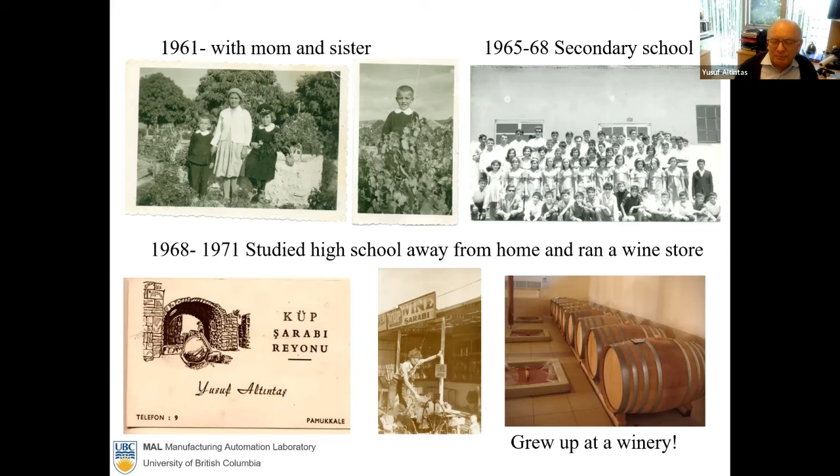I am still with the same girlfriend since high school, married with 2 children. I studied my master's at the University of New Brunswick between '78 and '79, and studied my PhD at McMaster University in Canada. I also worked 4 years in industry in between.

I joined the University of British Columbia in 1986 with $8,000 startup funding and a 1964 vintage junk milling machine, which was not operational and abandoned in the corner of somewhere in the building. I took it apart with a summer undergraduate student and retrofitted it with a motion control card and PC.

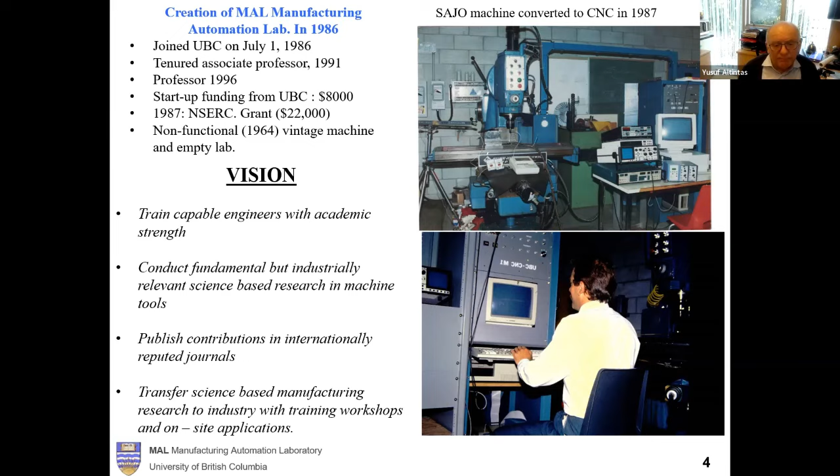Machine tool is one of the most complex mechatronic systems in industry: kinematics, structural dynamics, control theory, sensors and instrumentation, tribology, CAD/CAM, everything, pretty much. And of course, mechanics and dynamics of cutting subjects are also at the core.

Our research in the laboratory covers entire machine tool engineering, starting from vibrations, design, control, monitoring sensors, precision machine and actuator design, multi-body dynamics of the machine tool, and so on.

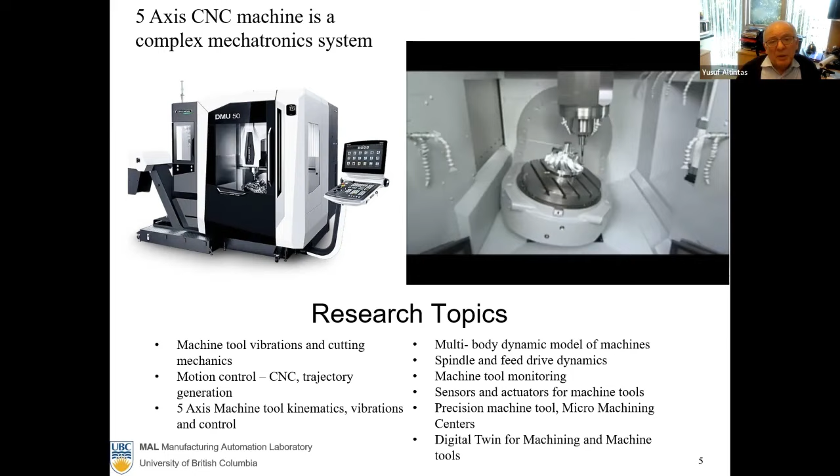The laboratory grew up quite a bit in 37 years. We currently have 5 PhD students, 7 masters, 2 postdoctors, and 5 research engineers funded by industry.

We usually receive several interns, visiting professors and engineers from different parts of the world. Up to recently, we were receiving about $1.2 million per year for research grants and contracts. The lab is fully equipped to conduct research in machine tool engineering.

We publish over 210 journal papers and a book with 2 editions translated to several languages, and the citation is pretty strong for our published work, as you can see here. Also, UBC opened a spin-off company which commercializes our research, and it is used by more than 300 companies worldwide.

These are some of the machines we have in the laboratory: an old Hardinge lathe, an old Fadal CNC - we added 4th and 5th axis, and it is completely controlled by our own CNC.

And a Quaser 5-axis machine tool with Heidenhain CNC, donated from Taiwan ITRI. And this is our newest machine, a DMU 50 Machine Center.

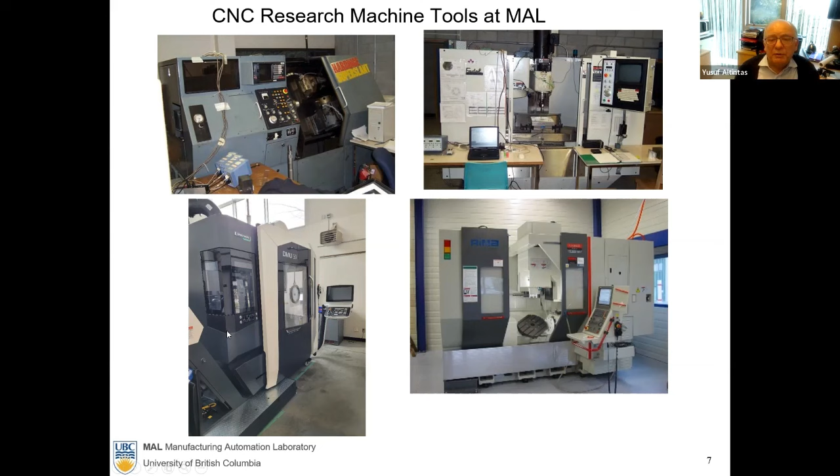And we have a CMM and Micro-machine Center. This is a 9-axis machine, which we designed and built and controlled in our own laboratory. We also built several actuators, such as fast tool servo, ultrasonic vibration assisted tool holder, and so on.

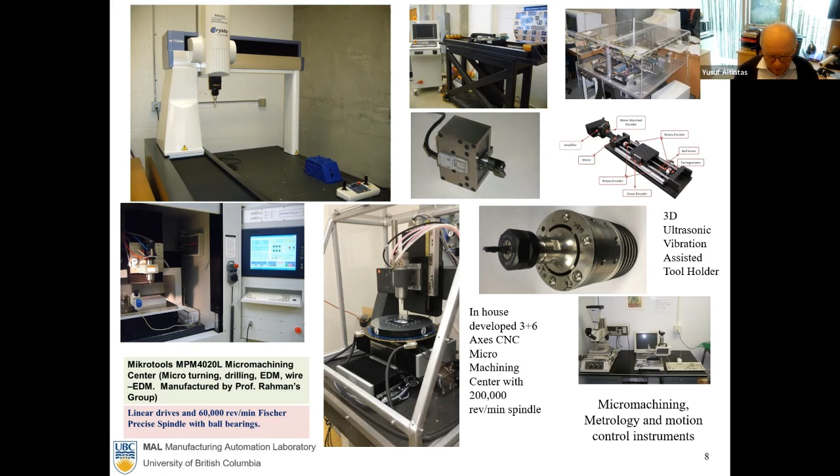Our research is published in a textbook, first published in year 2000, and the second edition was published in year 2012. They are translated to Chinese and Turkish. I also wrote my memories in Turkish.

The book talks about naive and stupid things I did when I was a child, young man, and also some stories from my town. It does not talk about how good stuff I did in university and so on—that would be nonsense. It is just more fun to read. Unfortunately, it can't be published in English, it will lose its sense of humor.

Now I can start talking about my research. Digital machining has always been my prime target. In a traditional manufacturing industry, you take the CAD model, and experienced planners design the machining strategy and select tooling and cutting conditions. The NC program is generated, put on the CNC machine, and hopefully the results are satisfactory. If they are not, you go back and repeat the trial and error cycle.

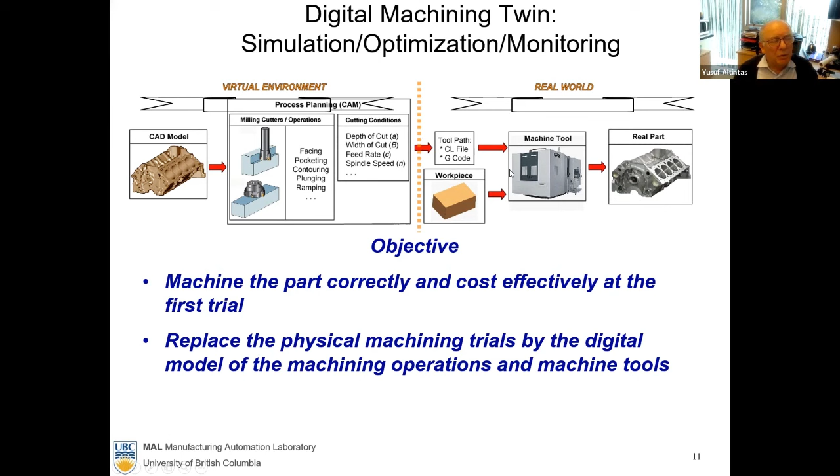The first paper I wrote in this area was published in 1991 when I became a CIRP member. This was a paper from Dr. Spence's PhD thesis. We developed a 2.5-axis CAM system, and we integrated physics of machining into the system, and used that for monitoring and control of the process as well.

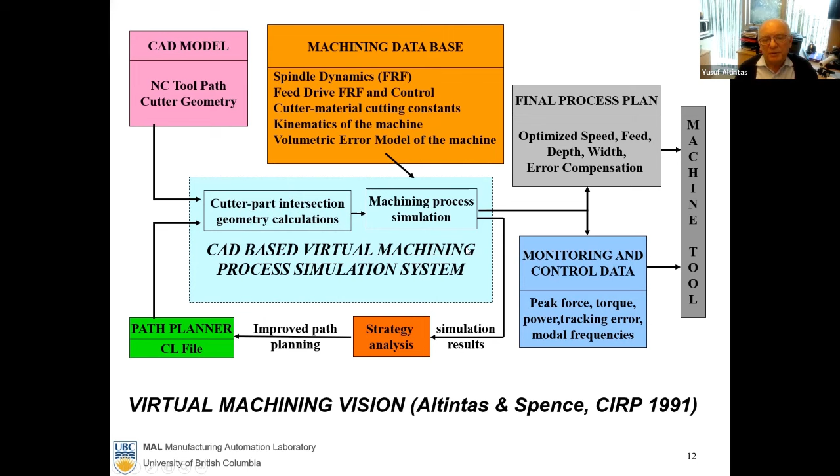Since then, of course, we progressed quite a bit, and we realized that this was a huge research task. Digital machining has three fundamental modules. The first one is the CAD/CAM module. The second is modeling the mechanics and dynamics of the machining operation.

We packaged our theories into one software called CUTPRO, which was released in year 2000, about 23 years ago. The third part is machine tool kinematics and CNC. Since we developed our own CNC, first out of poverty, later out of fun, we can also mimic the CNC.

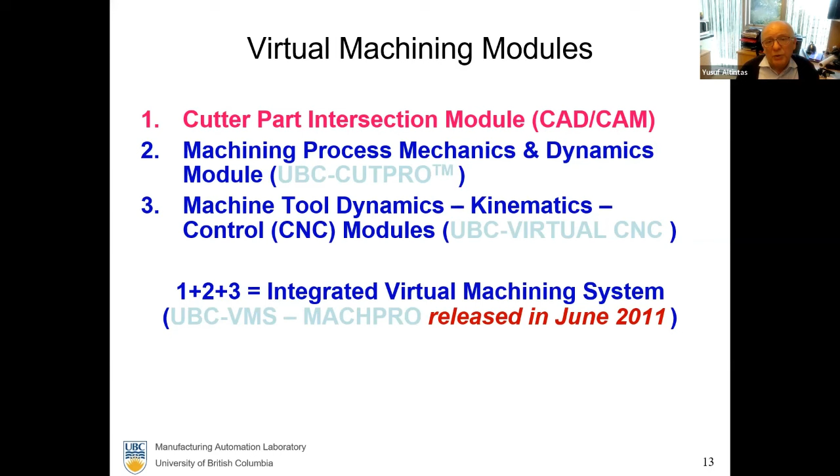By integrating these three, we developed a virtual machining system, and it was released to industry as a commercial product under the name of MACHPRO, back in June 2011. I will walk you through now these three steps. The first one is CAM.

Here I show you a very simple prismatic part machined with a helical end mill. As the helical end mill moves along the tool path, it will engage with cavities and holes, so the geometry is not constant. It varies depending on the part features. When the tool goes over these cavities, the chip shape continuously changes, as you see here.

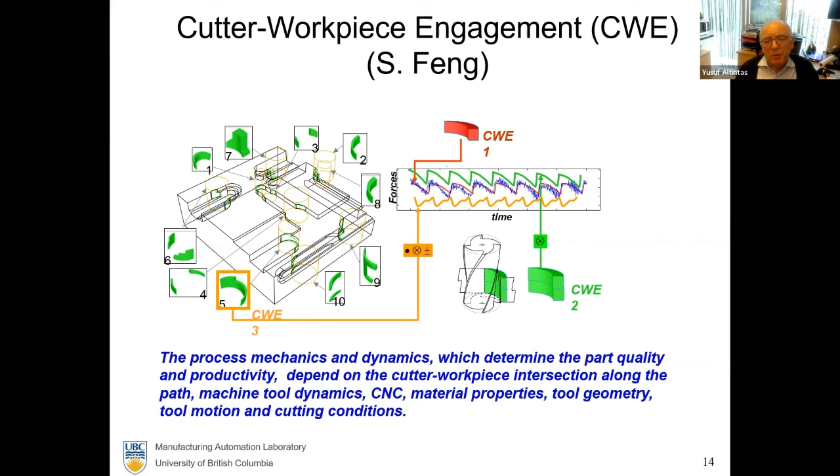The chip shape is used as the boundary condition to predict cutting force, torque, vibrations, and so on. Therefore, the cutter-workpiece engagement along the tool path must be calculated. We conducted research in this area, but later Professor Steve Feng joined our department—this is his expertise. The second is mechanics of machining.

We approach this problem in two directions. One is so-called micro mechanics, where we consider temperature, strain, and strain-rate dependent material properties in this plastic deformation zone, which is called the cutting zone or primary deformation zone. We use both finite element techniques as well as slip line techniques to predict stress, strain, and temperature distribution within this small cutting zone, which may be typically 200 microns by 200 microns.

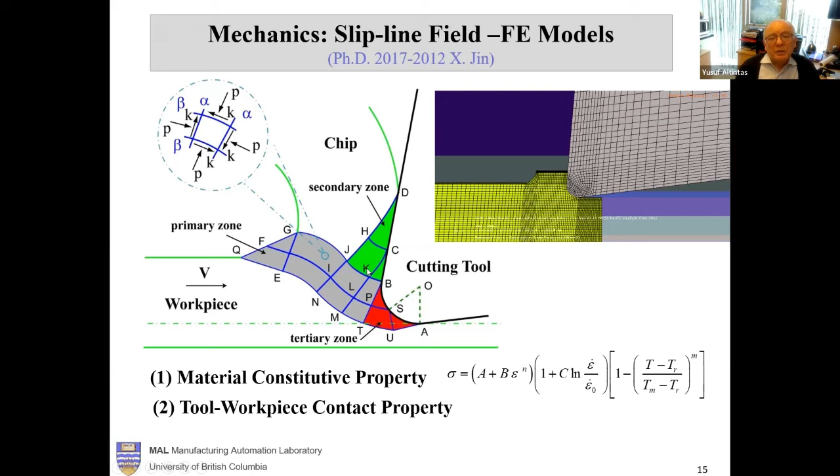We also use a macro mechanics approach to predict the forces in the cutting zone. Here we have a typical oblique cutting mechanics model. By using material properties, tool geometry, and cutting conditions, we can predict the forces acting on the rake face, normal and friction force, basically.

If we can predict these forces as a function of material property, then we can transform these forces to different kinematic configurations, such as turning, boring, milling, drilling, and the list can go on. But common to all of them is the cutting process between the chip and the tool here. The rest is nothing but mathematical transformations.

Therefore, we developed cutting mechanics models to predict the force between the rake face and the chip, and we adapted that mathematically to any machining operation. This was our philosophy, studied by Dr. Kilic, who is now professor at the University of Manchester.

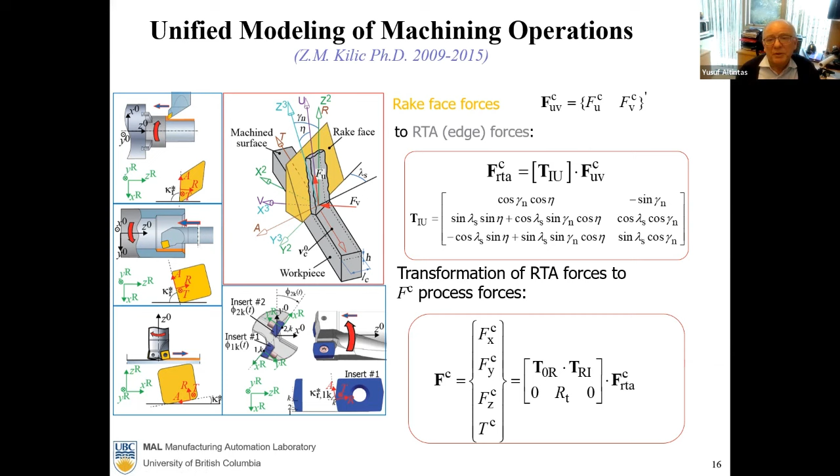Here is one sample result. The tool is a taper helical ball end mill with variable pitch, machining titanium, which is a very difficult material to cut. You can see the comparison between experimental measured cutting forces and simulated results, which are not bad.

We use shear stress, shear angle, and friction coefficient of the material to predict these forces, back in 1995, a while ago.

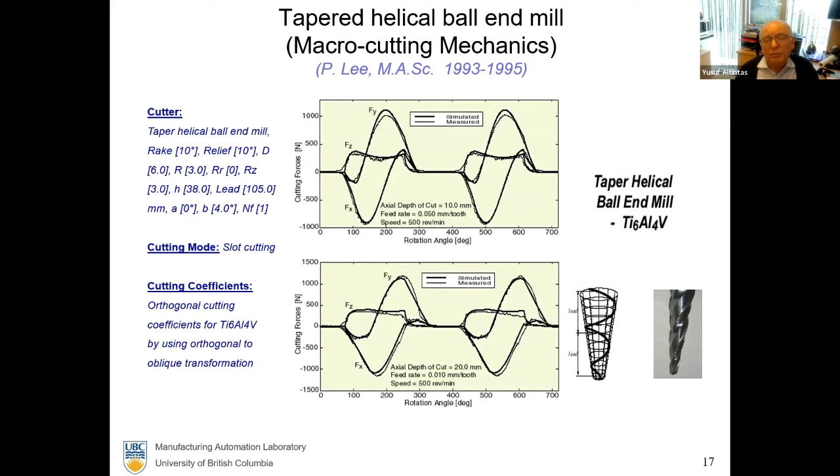When it comes to micro-machining, tool diameter could be as small as 100 or 200 micron. Chip thickness would be 2-3 micron only. The amplitude of the forces would be within 1 Newton as opposed to 1,000 Newton.

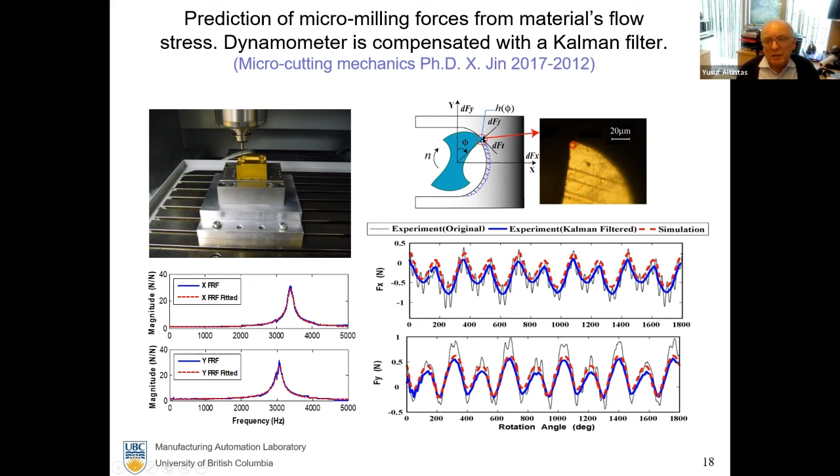Even the measurement of forces is difficult here, because if the rotational speed is too high, tooth passing frequency may be too high and resonate the dynamometer, and the force measurements will be incorrect. We developed some compensation techniques to predict the correct force from measurements.

One of the biggest problems in industry is machine tool vibrations. Here we have a diagram of a typical machine tool, which has heavy components such as the bed and the column, medium-sized components such as the headstock, and lighter components which move, such as spindle, tool holder, and tool assembly.

Lower the spindle speed, you tend to use large cutters and vibrate large parts of the machine tool. If the tool diameter becomes smaller, you rotate the spindle at higher speed to reach a certain cutting velocity. Then you tend to vibrate the parts with higher natural frequencies, such as lighter parts like spindle, tool holder, and the tool.

Machine tools are flexible because they are made from steel. When the tool rotates and impacts the workpiece, these flexibilities are excited, and we create transient vibrations, which leave a wavy surface behind. When the second tooth comes and impacts, then if the vibrations do not diminish...

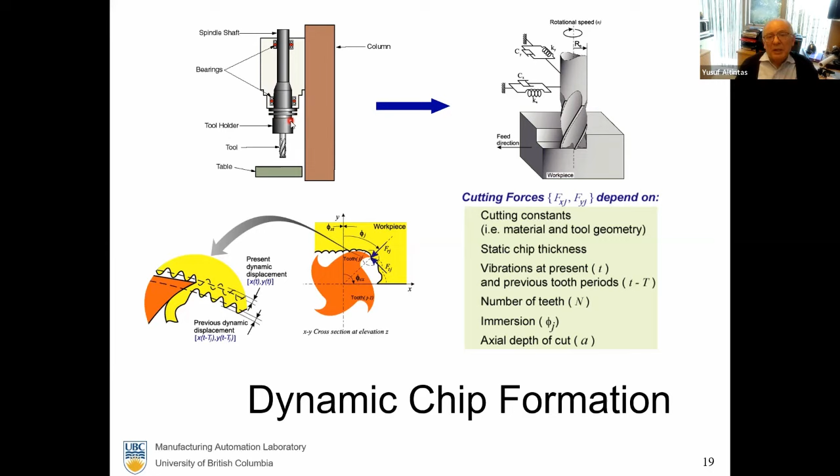As a result, we have 3 types of chip. The first one, there's no vibration, which is impossible. All machine tools vibrate. If the cut is very light, you hardly have any vibration naturally, but that's conservative, non-productive machining.

If the vibrations become unstable, we call that chatter vibration, where outer and inner waves on the chip surfaces have a phase shift. They shift relative to each other. These vibration amplitudes exponentially grow until the tool jumps out of cut or you break something.

The chip may be almost zero when the 2 waves touch. Then it can become large, almost 3-4 times larger than the feed rate. When the chip grows, the force grows, therefore the load on the tool and the structure grows, which may cause tool breakage or damage to the machine and the part.

The objective of scientists is how can we make these 2 waves as parallel as possible, which is physically impossible, but you can get close to this situation. Imagine a case when these 2 waves are parallel. Then the machine is allowed to vibrate, but the chip thickness remains constant, like here.

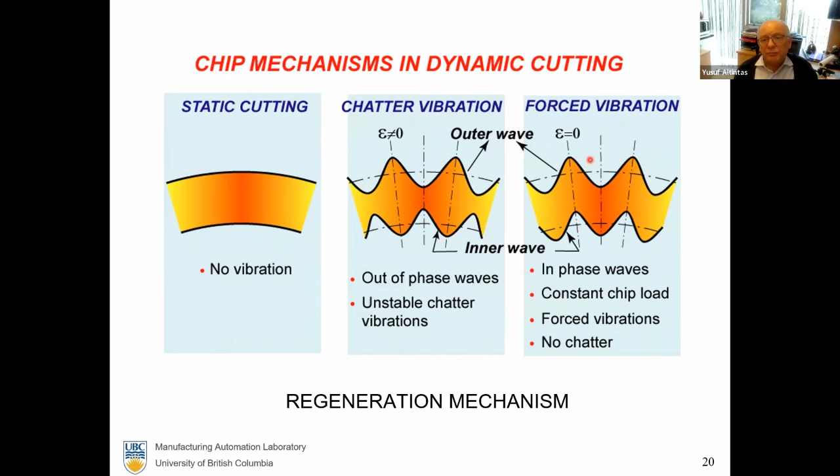If we take a look at a typical mathematical model of the chip, the first one is the static chip thickness. In milling, it sinusoidally varies as a function of the tool's rotation angle, phi. This is due to rigid body motion of the machine.

Then we generate vibrations at present time t. The vibrations in x and y directions are superimposed in the direction of the tooth, phi. And also, we consider vibration marks left during the previous tooth period. So the time delay Tj here is the delay time between the present and the previous tooth. Again, we project the vibrations.

When you sum these three components, you get the true chip thickness, which is a long equation. Since the tool is rotating, phi is changing. Therefore, the chip thickness is changing.

Since vibrations x and y are also time varying, they also change as a function of time. As a result, we have time varying chip thickness, but it is periodic at the tooth passing frequency, which is the inverse of capital T here. When the tool is in the air, then we have no chip, so we have a discontinuity, which is governed by the G function here. This is just to give a window of theory in stability.

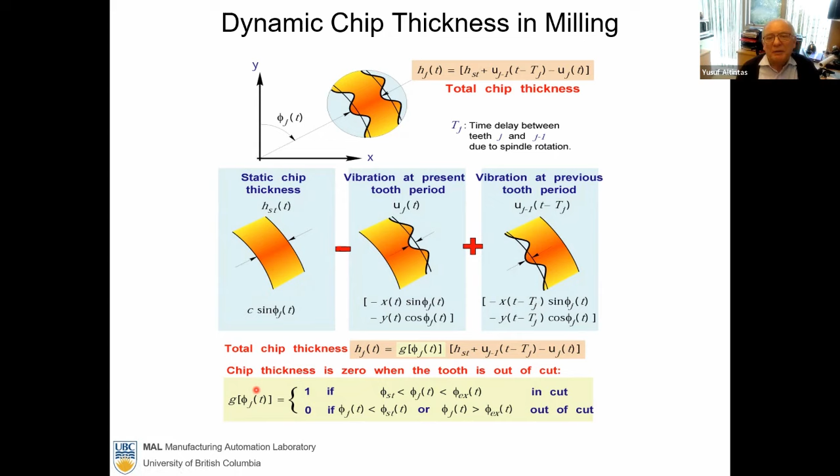If we take the most simple case, 2 degrees of freedom, that means single degree of freedom in X, another single degree in Y, and we have periodic time varying coefficients, matrix A here, and we have vibrations with delay terms here. Since this is a non-diagonal matrix, this is a periodic coupled delay differential equation, which is difficult to solve.

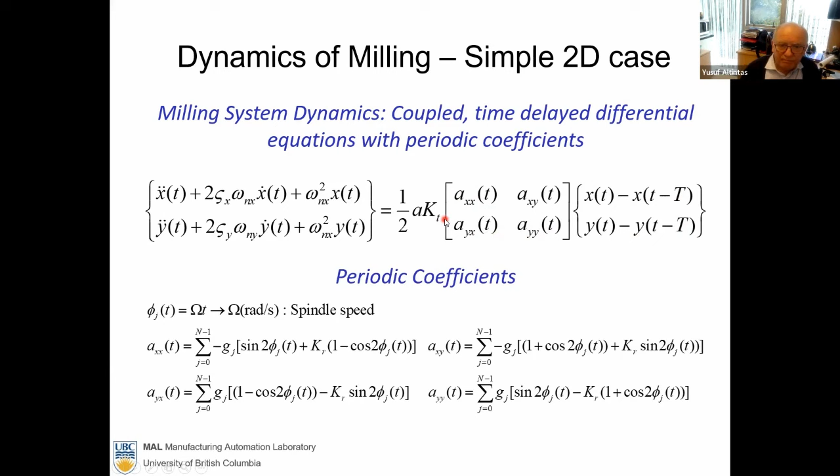Dr. Budak, now professor at Sabancı University, solved the stability problem in his PhD thesis in our laboratory back in 1994, and we proposed two solutions. One is the zero-order solution, which I presented in CIRP, and the other is the multi-frequency solution, which we published in ASME.

Zero-order solution is very straightforward. KT, KR are the material properties, FRF is the dynamics of the machine, and we reduce the stability problem into an eigenvalue problem like this—a second-order quadratic equation. A0 and A1 are material and dynamics dependent coefficients. Lambda is the eigenvalue with real and imaginary parts.

Physically, the eigenvalue equals depth of cut, material's cutting force coefficient, and the delay term, which contains spindle speed. So if we solve the eigenvalue with real and imaginary parts—two knowns—we have two unknowns: depth of cut and the speed. We can solve the stability diagram. This was our contribution to the literature, which is now widely used worldwide.

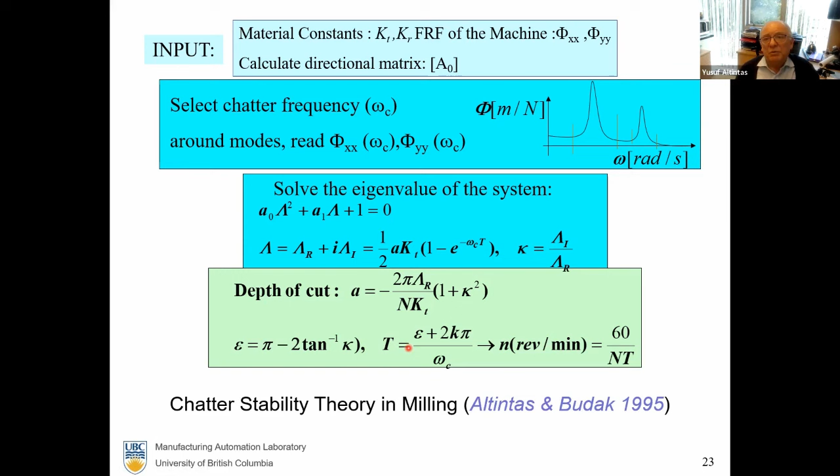For example, this is a cutter with circular inserts. The blue curve is the numerical time marching solution, which took about 24 hours. The red curve is the analytical frequency domain solution, which took less than a second. In industry, no one will wait 24 hours to look at the possible solution for chatter, but people can wait a second, and the results match almost perfectly, which proves the accuracy of the theory.

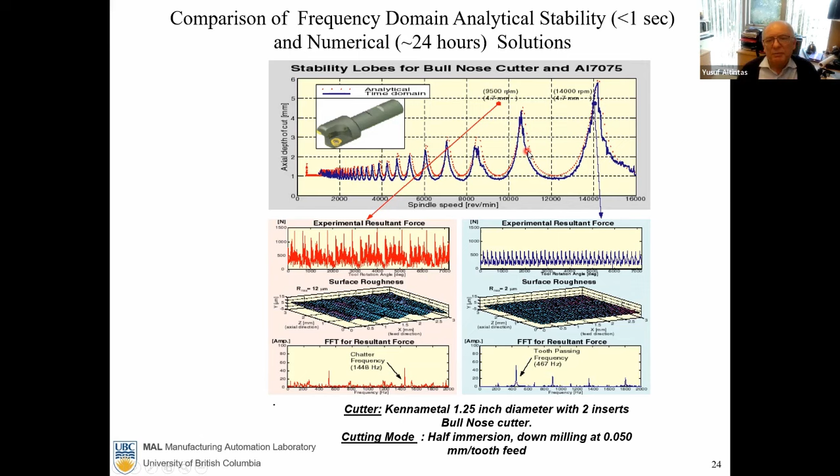We launched this theory to industry by developing a software called CUTPRO. The user gives impact blows to the cutter with an instrumented hammer and measures the vibrations. We measure the frequency response function, and we automatically fit curves to identify model parameters such as natural frequency, damping ratio, and stiffness.

We use the work material and tool geometry coupled with the dynamics of the machine, which is measured, to predict stability charts. This is the stability chart, meaning how deep you can cut at which speed. You have to operate the machine under the stability curve. For example, here the most productive cutting conditions seem to be 7,500 revolutions per minute, about 6 millimeter depth of cut, and this is used by the NC programmer to generate the part program.

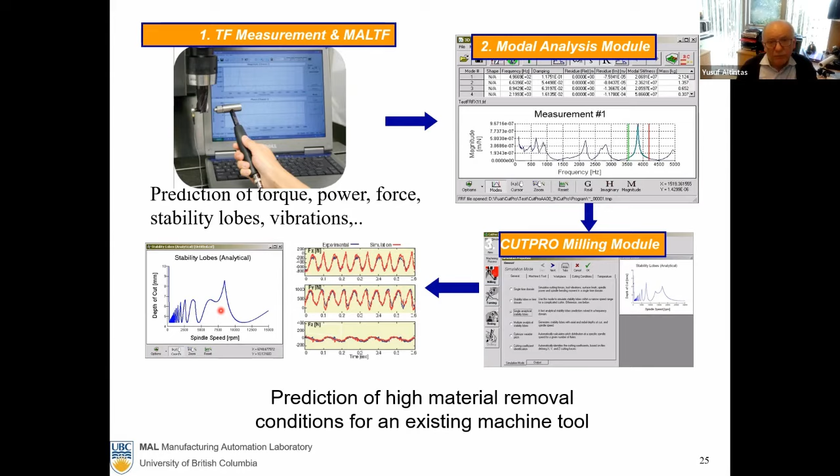And here is an example: at 15,400 the machine chatters. This way, you can improve the productivity of the machine tool drastically.

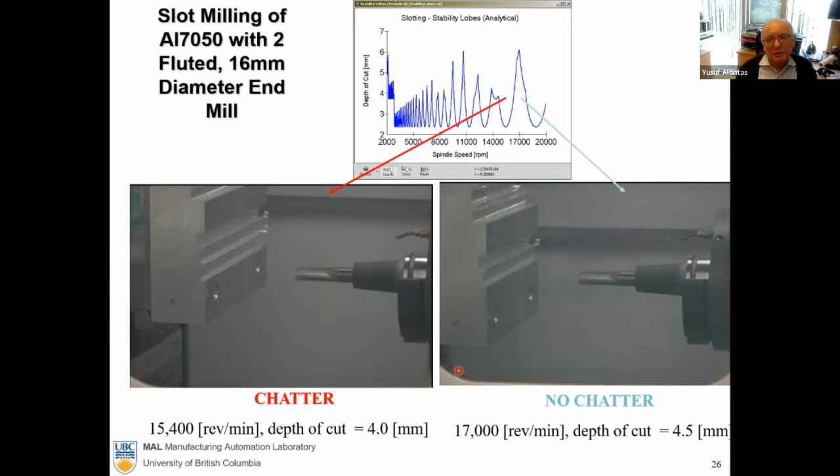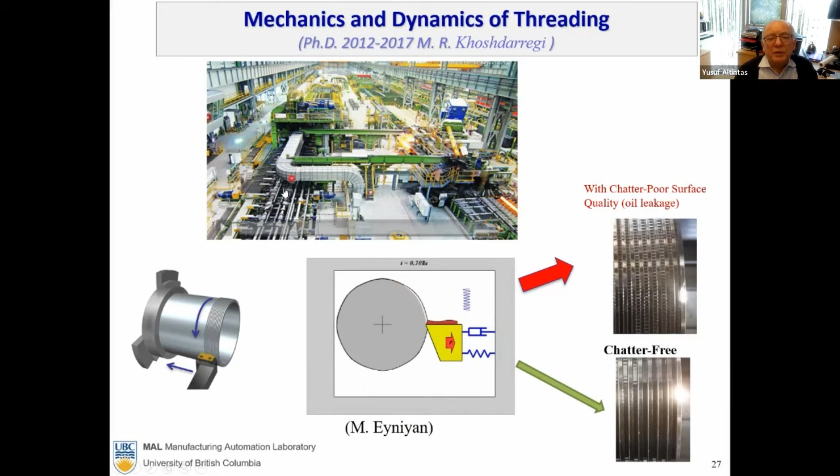We work on other issues as well. Here is the animation of chatter development. I borrowed this from a former student, Dr. Mehdi Eyniyan, and it's a very good illustration to show how instability occurs in machining. This is from one PhD thesis.

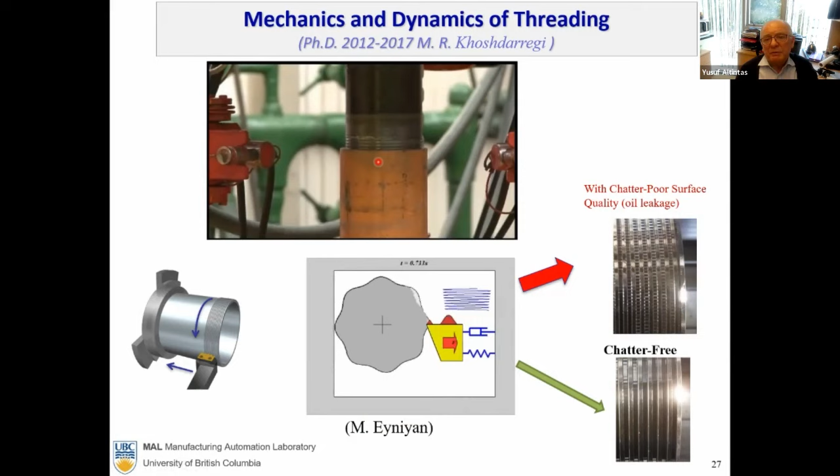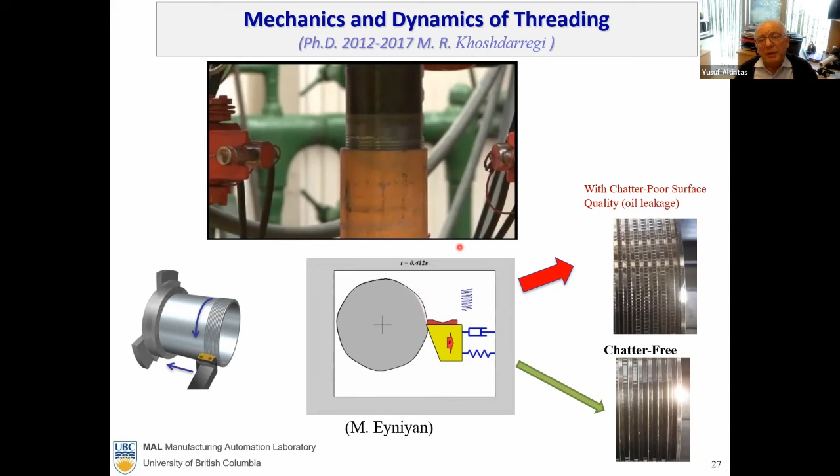A Mexican company approached us because they had pipe failure at the threaded joints. In subsea applications, this could be environmentally disastrous. During threading, this pipe is highly flexible, it has so many mode shapes, and if it chatters, the wall thickness of the threads would not be uniform. In some locations it would be so tiny, and it would shear during fatigue failure of the pipe. The project was to model this complex process, and we did. We packaged the mathematical model into software and released it to the company, and also published everything in open literature.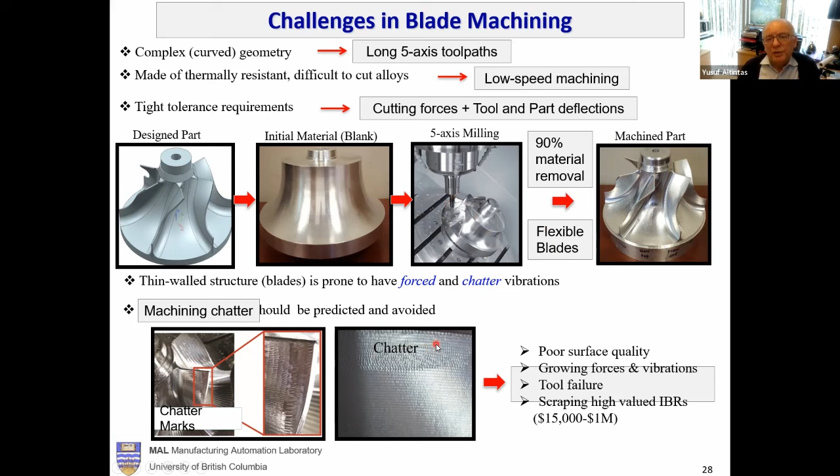This is unacceptable. The project was to digitally model the entire blade machining operation in a digital environment. Let's say this is the blade—at each point, the flexibility of the blade is different. Furthermore, as we remove metal along the tool path, we are changing the mass of the structure continuously. Therefore, blade dynamics is also changing as a function of time.

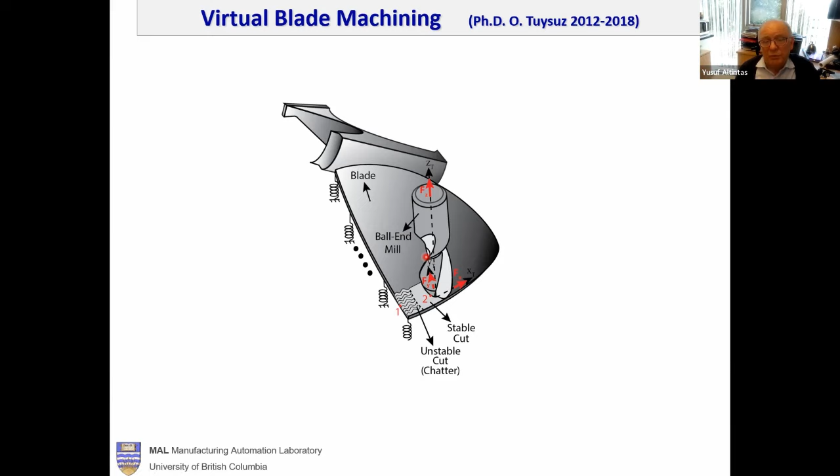If you freeze the process and run finite element analysis at each 1-2 millimeter step, it would take days to simulate the operation. Therefore, a PhD thesis studied substructuring techniques to update the FRF of the blade without going through an eigenvalue solution for the full finite element model. The steps are as follows.

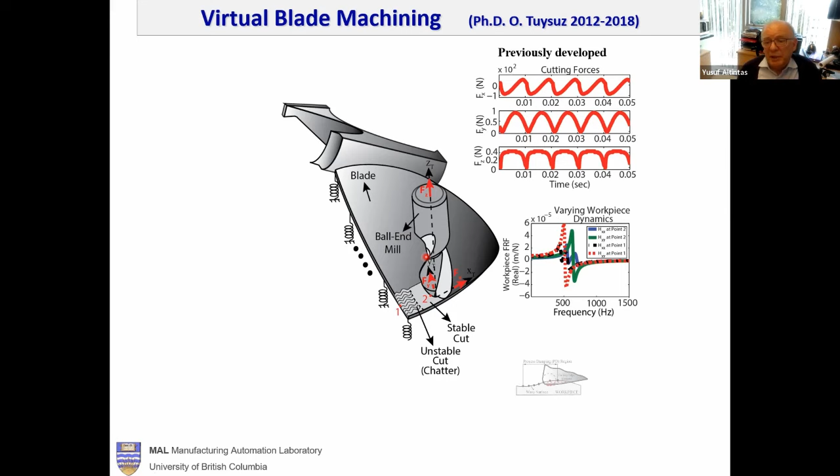We can predict the forces if we know the cutter-workpiece engagement, which is known. Then we predict the FRF along the tool path as the mass is removed. We include contact between the flank face of the tool and the wavy surface, which is called process damping, to predict stability charts.

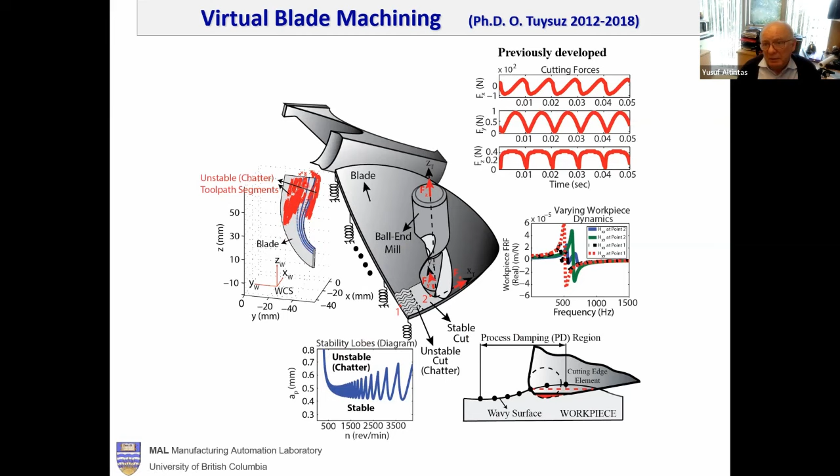Along the tool path, we can tell the engineer: look, you don't have any chatter in this region, but here the blade is too flexible and you are machining aggressively, and you will get chatter, which will be unacceptable in production. So the engineer can improve the tool path until the chatter is gone.

We can also predict the deflection errors left on the blade. For example, here we predict about 80 micron deflection, and the measurement is also close. We are still studying this, it's a highly complex problem. We can never probably perfectly predict the outcome, but as you see, we are not that far away from measurements.

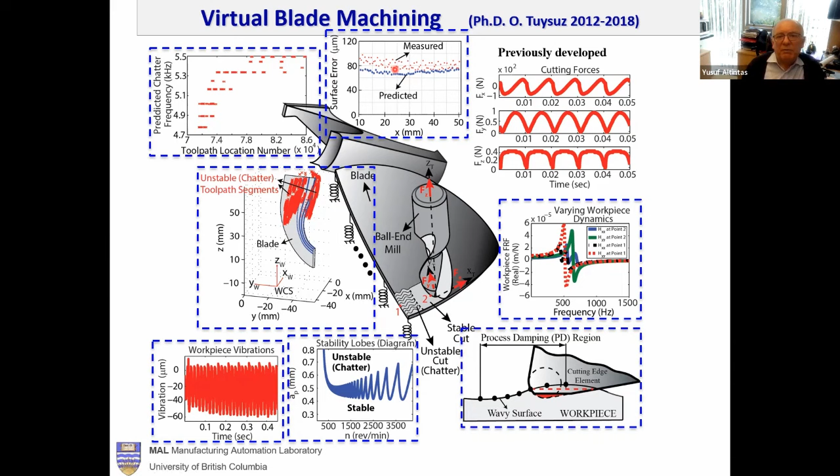Now we have another student, Behnam, who is about to finish his PhD on the same topic, and hopefully we will release this to industry within a year.

All of these physics-based models are incorporated into digital simulation software called MACHPRO, and the mathematical models were developed by Dr. Merdol in his PhD.

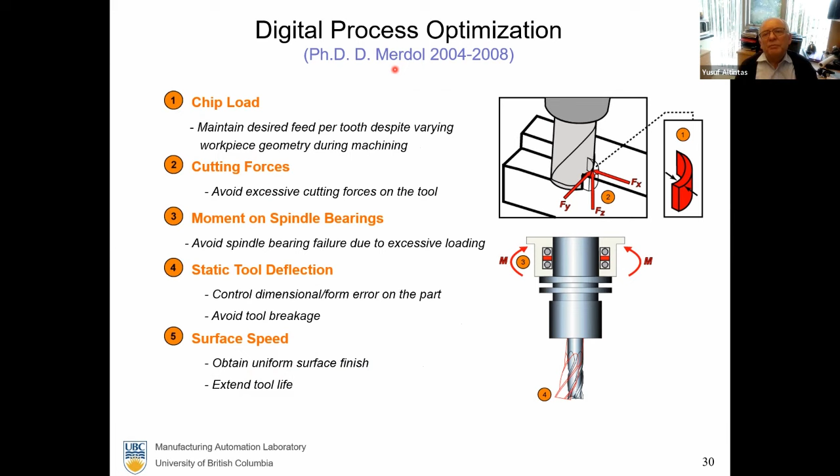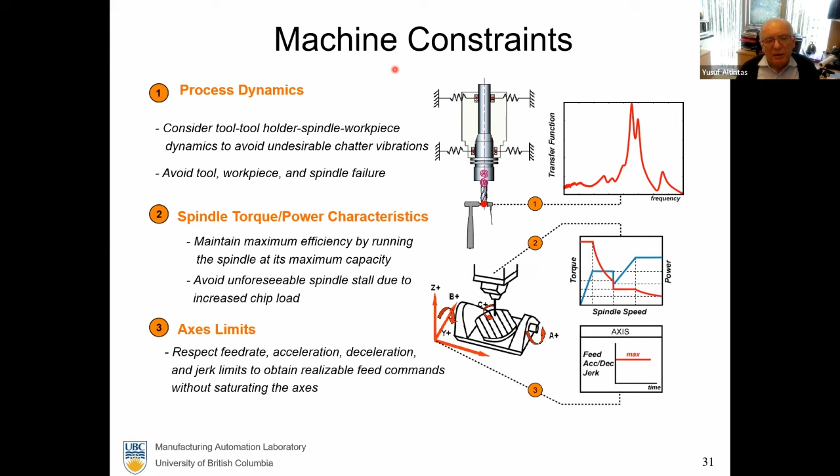We include chip thickness, force, torque on the spindle and power, drive motors, axis limits, all of them as constraints. We give the NC part program to our software called MACHPRO. Not only do we simulate the process, like you conduct a cutting test on the machine, put sensors and measure the states, you can predict ahead of time everything.

We also optimize the NC program to adjust it to fit the machine without any tool breakage, excessive deflection, overloading the spindle, and so on.

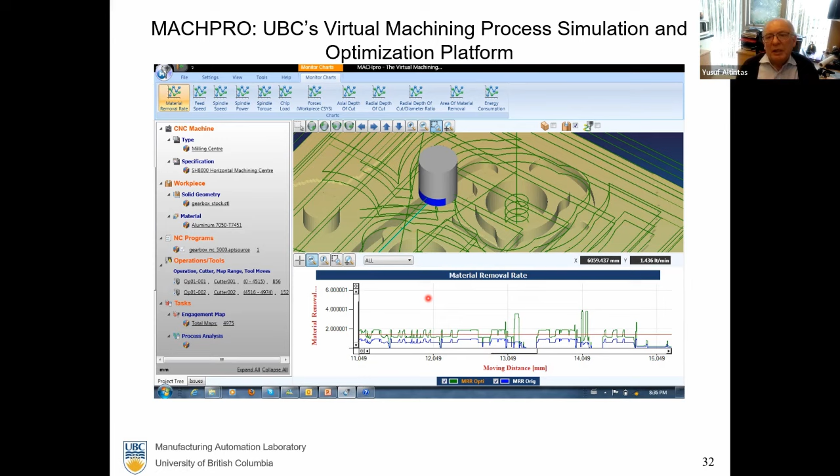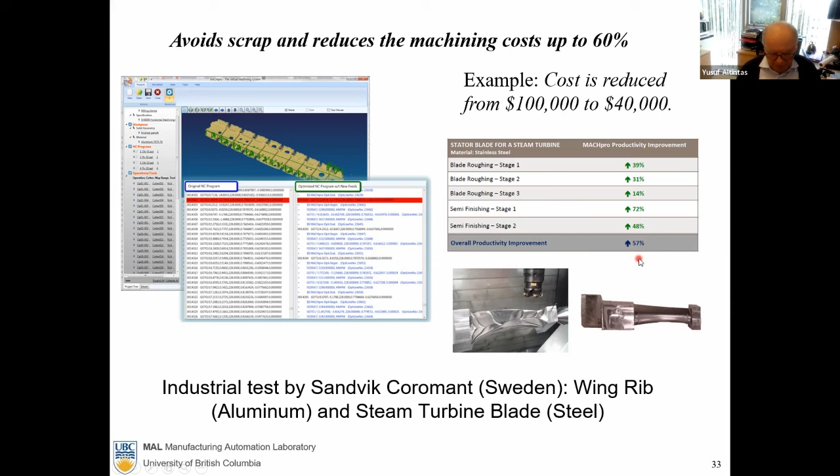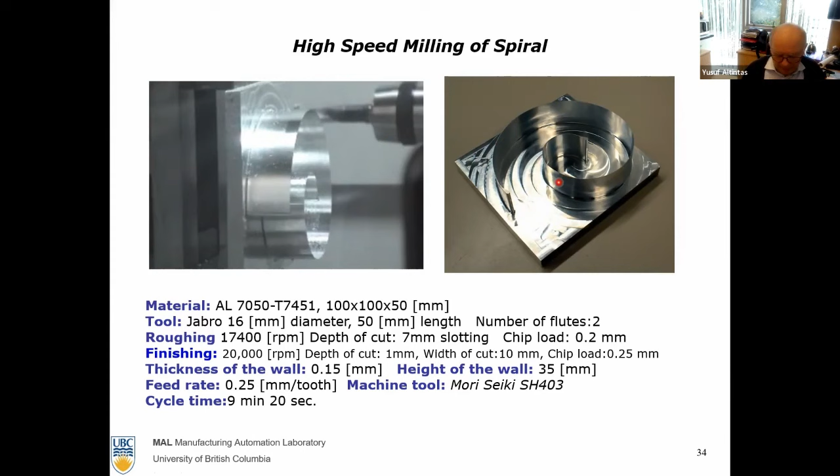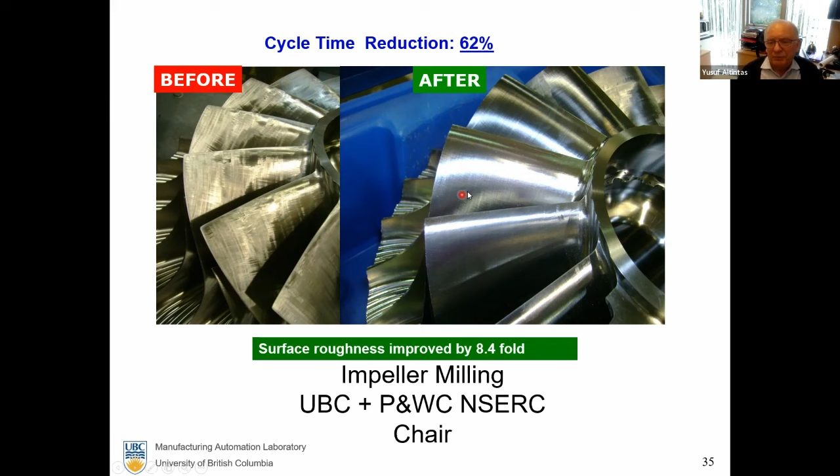This comes directly from the machine center.

We also work on flexible multi-body dynamics of the machine tool towards machine tool design. When the machine tool parts change their location during machining, their dynamics also change. We call this pose or position-dependent dynamics of machine tool structures. We develop substructuring techniques to calculate the dynamic behavior of the machine fast, in a computationally efficient way.

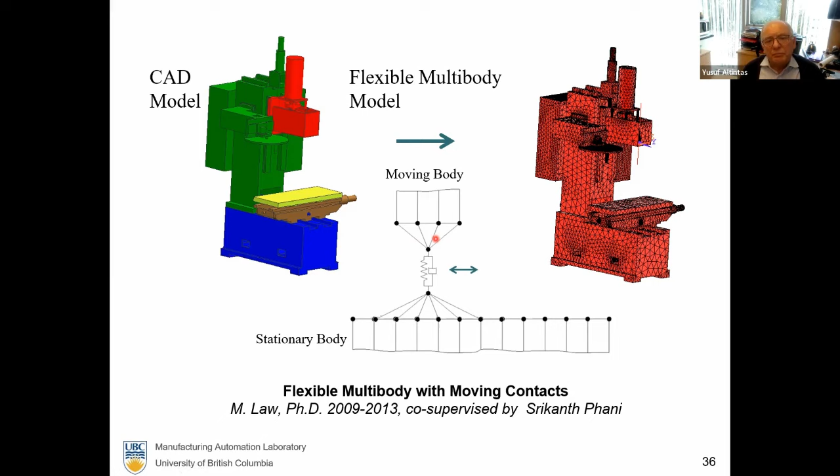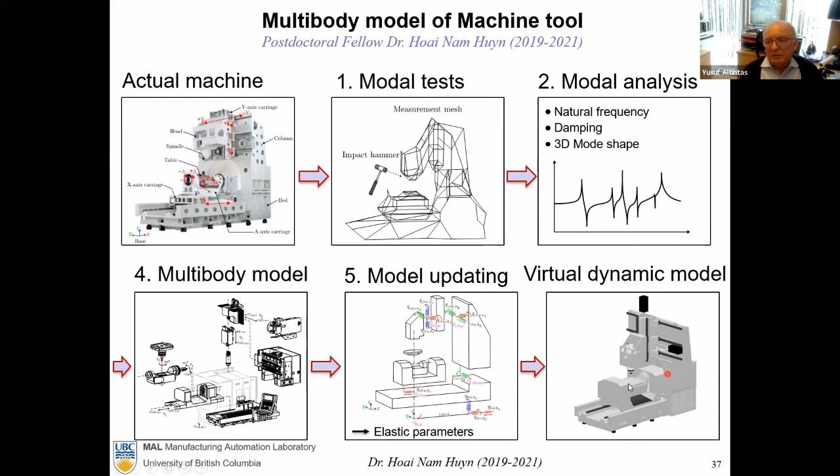We also have a parallel, experimental approach. This is our machine; we model the machine using modal analysis tests. These are the substructures of the machine, which are connected to each other with springs and dampers that are not known. We identify these springs and dampers from experimental modal analysis, and we develop a virtual model of the machine tool.

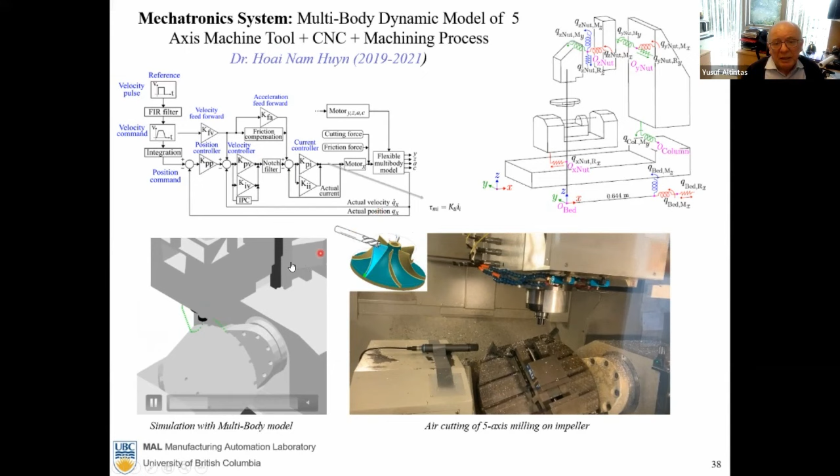On the left-hand side, we have the digital twin, which includes machine tool dynamics, servo controller, CNC, and cutting process. On the right-hand side is the real machine. This way, you can realistically simulate the behavior of the machine along the tool path.

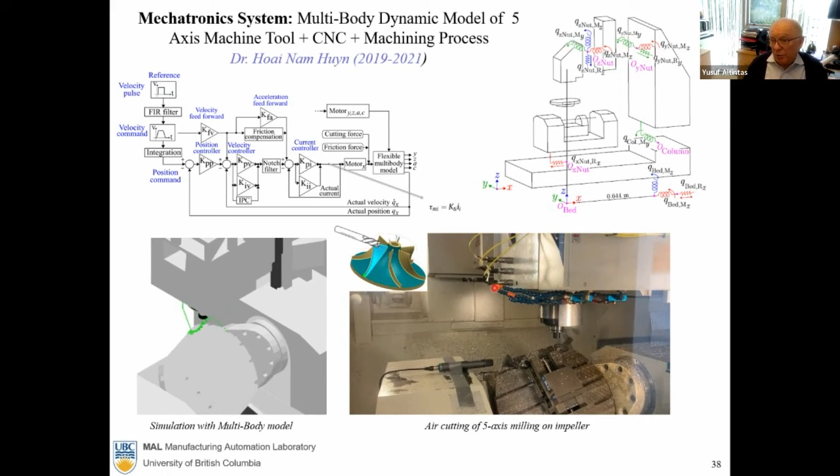Another project is spindle dynamics. Back in the year 2000, Boeing approached us and complained that they cannot use high-speed spindles at the speeds they want. So we had a joint project together with Boeing, Siemens, Weiss Spindle Company from Germany, and our lab. Weiss developed a spindle for us, instrumented with lots of displacement sensors.

We put the spindle on our machine and digitally modeled the spindle dynamics by developing a finite element model of the spindle ourselves. The most complex part was the nonlinear bearing stiffness model, which changes as a function of preload and speed.

Here we gave an impulse load on the real machine, real spindle, and measured the vibration. We applied the same impulse load on the digital model of the machine. You can see the responses are almost the same. Here you can see the frequency response function measured at the spindle nose and also predicted from the digital model of the spindle. They match.

Only the modal damping ratios are borrowed from existing spindles.

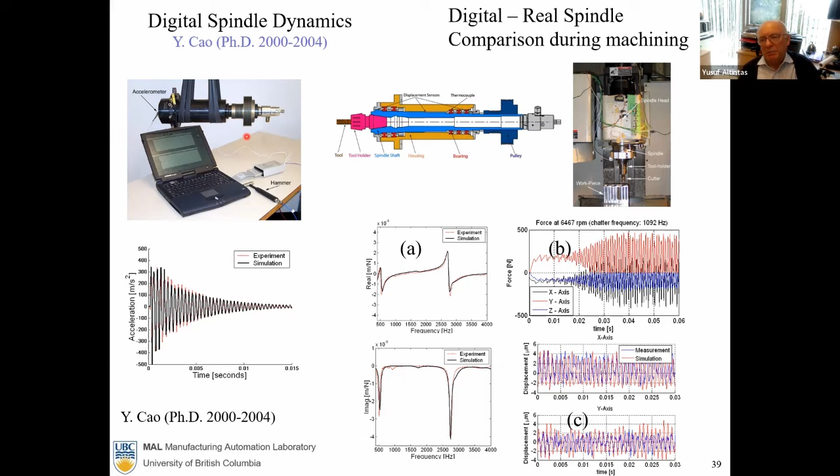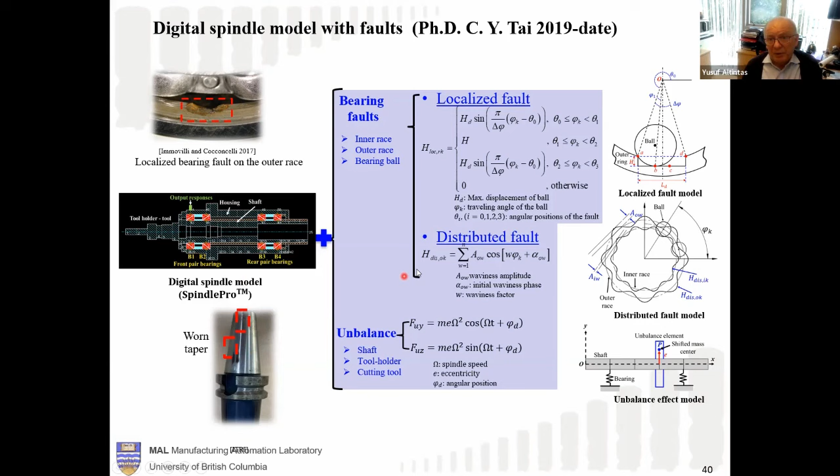Now the current research includes integration of bearing faults, such as chipping on the inner and outer rings of the bearings, damage on the ball itself, and wear on the taper of the tool holder, and so on. We incorporate the mathematical models of these faults into the dynamic model of the spindle.

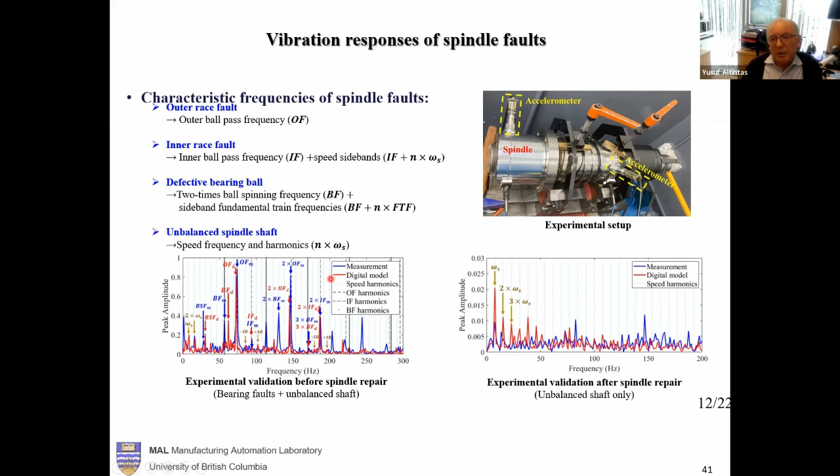We use the digital spindle to simulate the dynamic behavior when the spindle has faults. Then we use this digital model, which is experimentally proven, to train artificial intelligence neural networks and apply machine learning theory to diagnose the failures, the faults, on the spindle.

Most of it is trained using simulation data, which is free. Then we use only a few experimental data points, as you see here, to fine-tune the neural network parameters. And you can see the results are almost 99.8% accurate here.

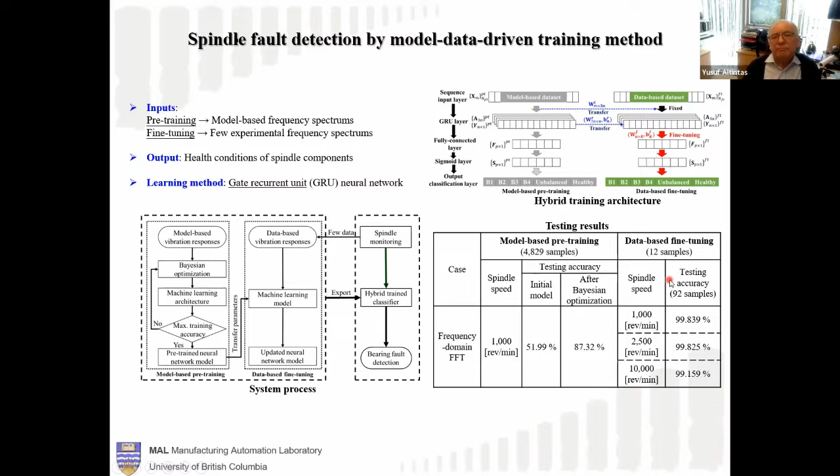Our laboratory also conducts research in mechatronics and precision engineering. These are some actuators we built.

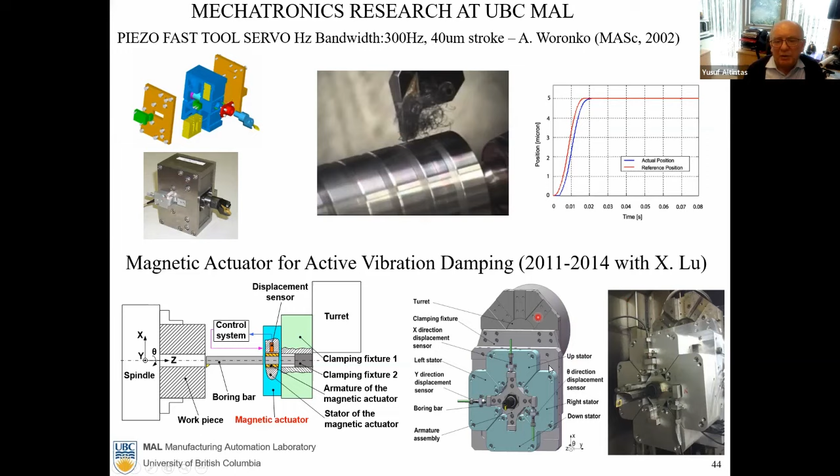This was a magnetic actuator for active damping of a very large boring bar.

This is another example, a magnetically levitated rotary table. The magnetic levitation principle was invented by my colleague, Dr. Lu, and we co-supervised this project together. Now it has become one company, and this company is growing quite rapidly and is very successful.

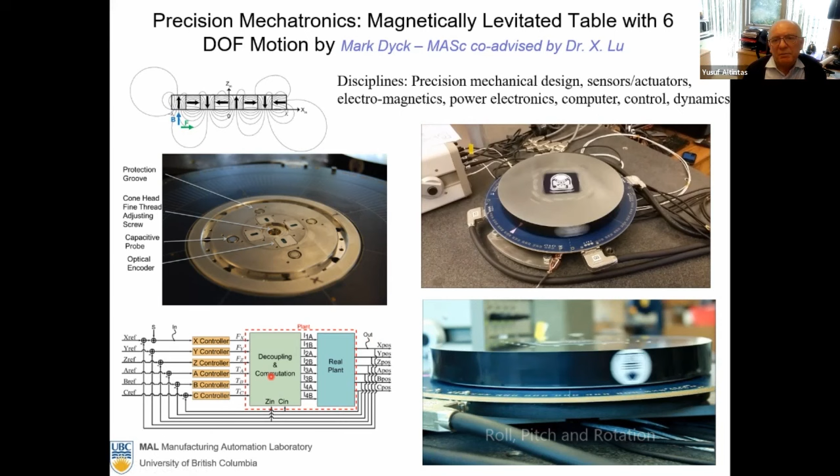By the way, the sound that you heard is not coming from an external speaker. The frequency bandwidth of this system is so high that Mark played Beethoven on his iPhone, but connected the earphone outlet to the amplifier of the table. So this mechanical table is acting like a speaker. It's so fast.

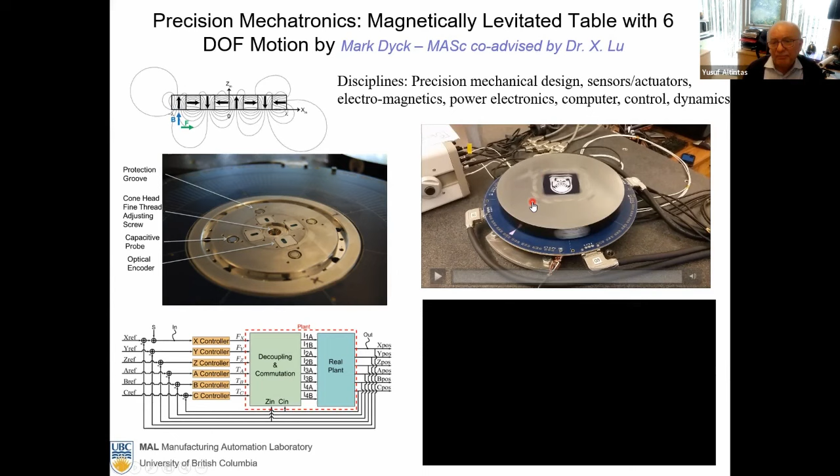Then we put this 6 degrees of freedom table on a 3-axis micro-machining center, which we built ourselves. So it became a 9-axis machine, completely controlled by our own CNC.

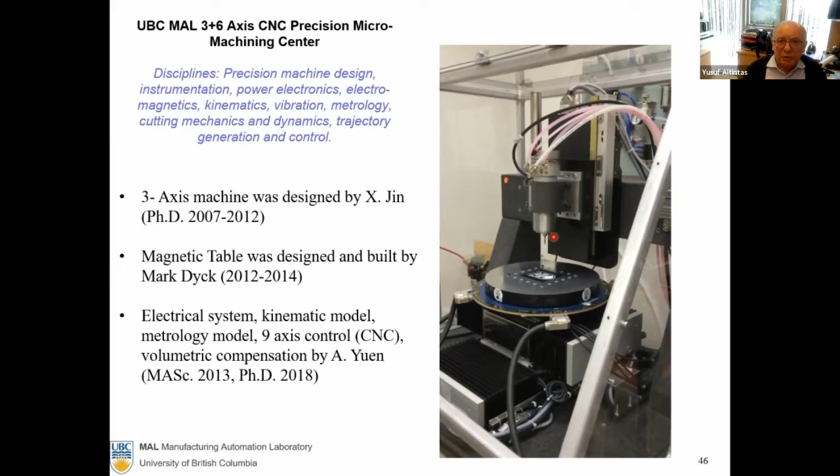This research was conducted by Alexander Yuen, who was working as the chief controller at Hyperloop. Now he has switched to another company as a control manager.

This is a highly sophisticated machine. It's a 9-axis machine with 4 redundant kinematics, so it has a very complex kinematics. Trajectory generation is also complex because we have to profile the motion for all 9 drives without violating jerk, acceleration, and velocity limits of any joint.

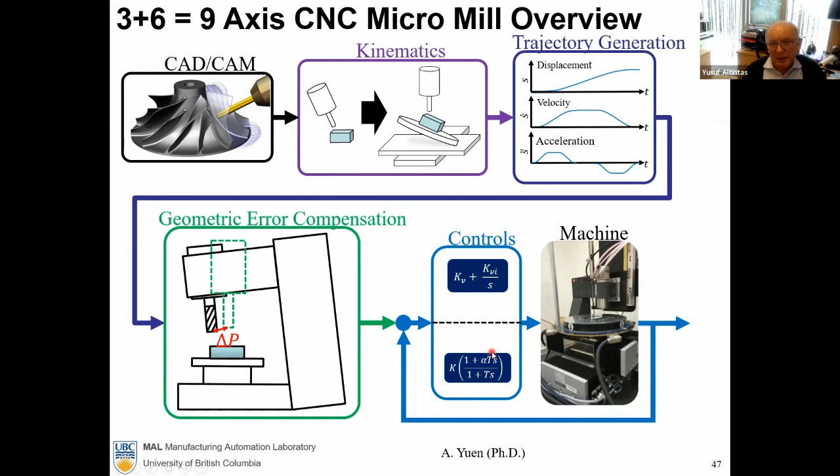Then the machine has geometric errors, which have to be measured with a laser and ball bar, modeled, and compensated in real time using a controller. Since we have dual actuators in some directions like X, Y, Z, we have to have dual controllers. So all of this was studied in one PhD thesis.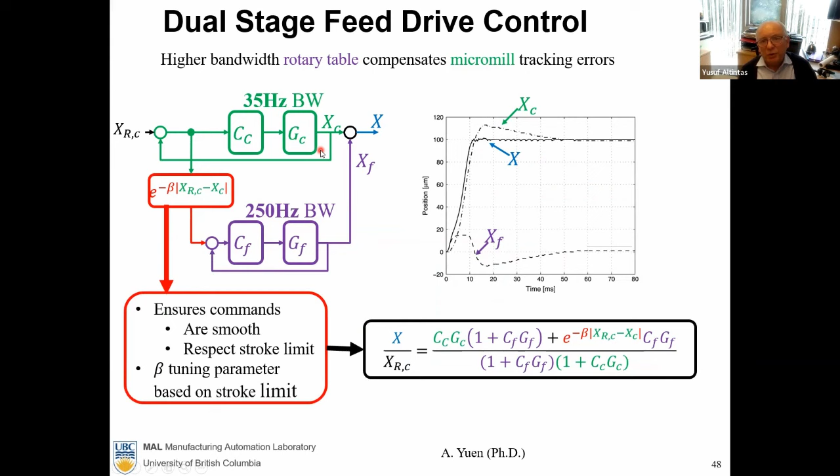For example, this is the dual actuator. As you see, it's much more precise, because one actuator has only about 20-25 nanometer precision, while the other has 2-3 micron precision. By using the two together, we can lock onto the target. And the machine really cuts.

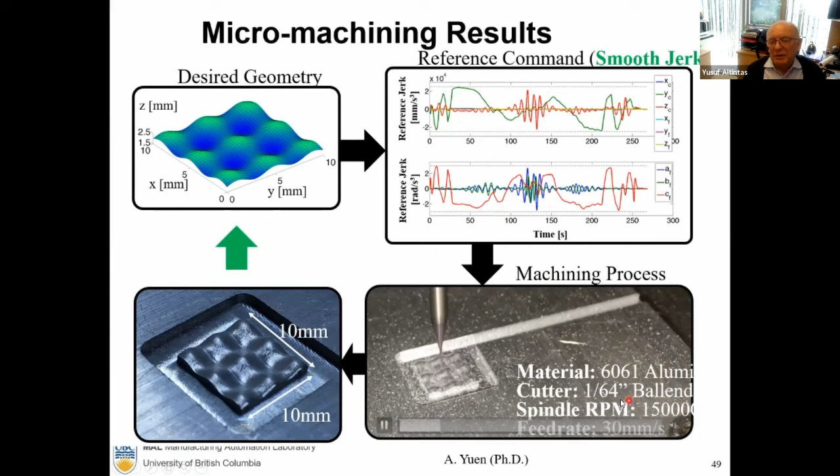If we excite the actuator at its natural frequency, we have resonance and amplify the vibrations. Also, we develop a controller by measuring only the current supplied to the piezo actuators. We can predict exactly where the tooltip is and what the tool velocity is. This is the controller.

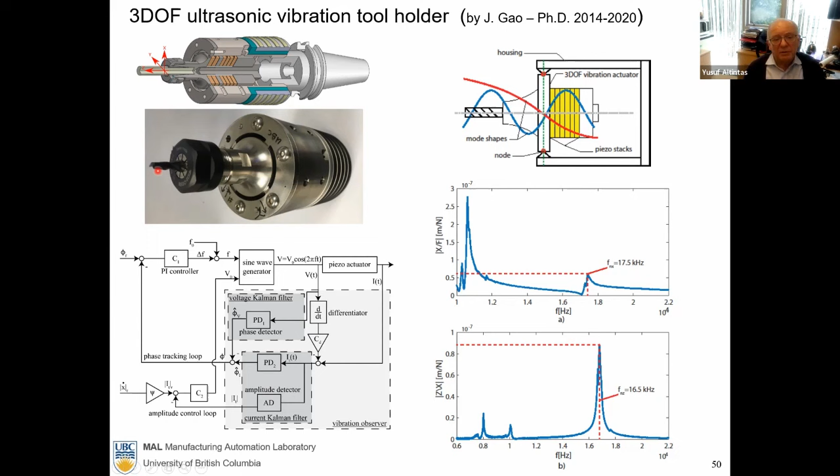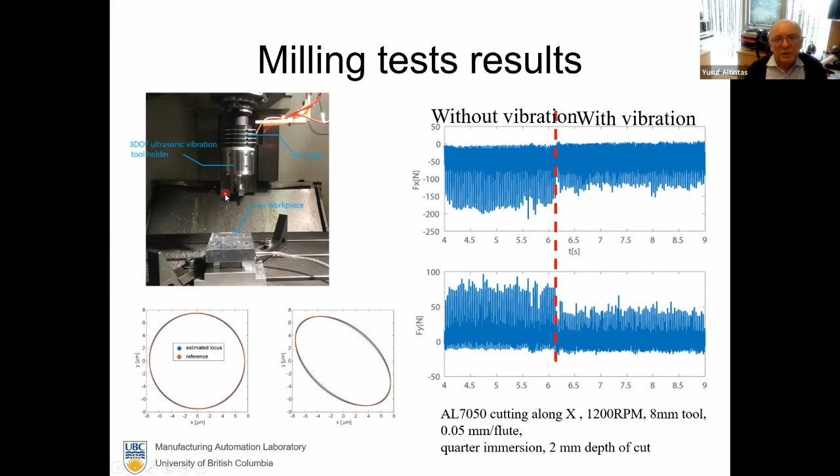And you can see this is the result. We can have a circle with 8 micron radius or ellipse because we can control the position in real time. We also cut a workpiece with this tool holder, and as you can see, the cutting forces are reduced by about 30%. Such tool holders are used mainly for machining composite materials to break fibers at very high frequency.

This is another master thesis project. This is the adaptively tuned boring bar. This is a long boring bar, and this is the cartridge, which has tungsten carbide mass supported by O-rings at the 2 ends. There is oil inside.

This research was done jointly by Sandvik Coromant engineers in Norway, the Silent Tools company engineers, basically. They have this technology. What Derry Lappin did, he developed a magnetic actuator.

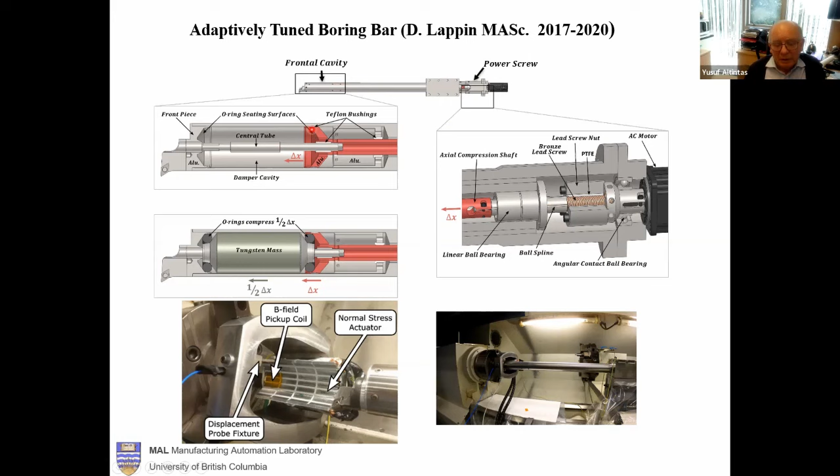Without any contact, he was able to apply impulse force on the boring bar. We measured the vibrations using a non-contact probe, and he put a servo motor on a lead screw attachment, which is at the end of the boring bar here. So the computer automatically tunes the spring constant, which is the O-ring here, by compressing or releasing it. This way, we can increase the dynamic stiffness of the boring bar.

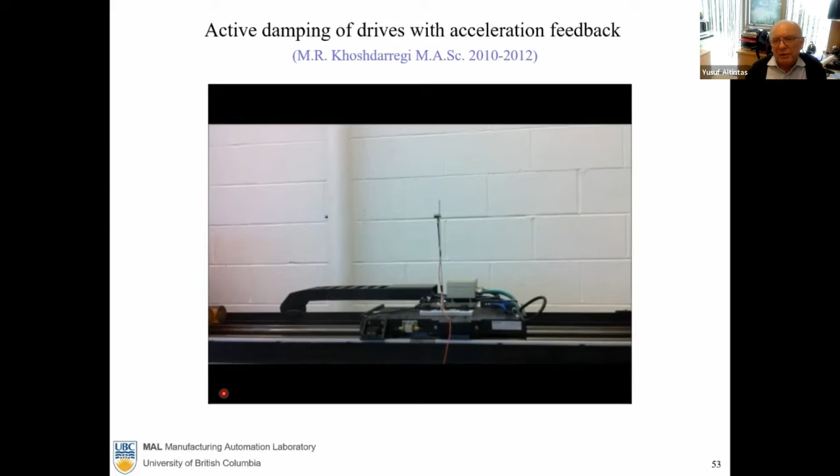This is another example of real machine vibrations.

These days, we are working on digital twin. What is digital twin? This is the real machine, and this is the virtual machine. We simulate the real machine, but we also measure the states of the real machine during machining, and we exchange data between the two.

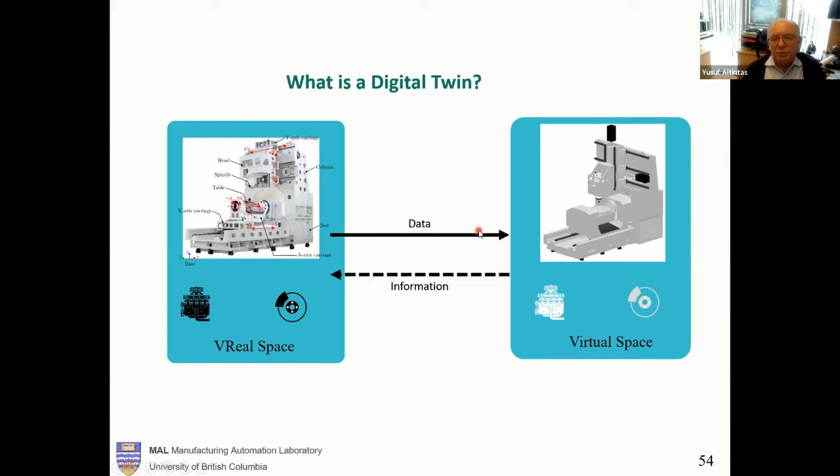And this is our kind of big idea. On the left-hand side, we have the real machine with sensors. On the right-hand side, we have the digital twin model, which are already commercialized. So we collect data from the machine tool and automatically calibrate some of the uncertainties in the digital model, or we can send information to the real machine tool before things happen in a feed-forward fashion.

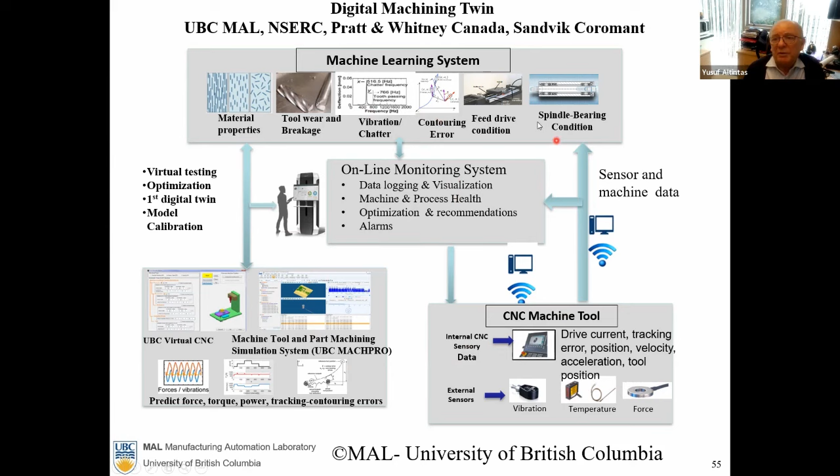We also collect data from the machine tool for long-term machine tool health monitoring, such as spindle bearing condition, feed drive condition, and so on. One example here is prediction of cutting force without using a sensor.